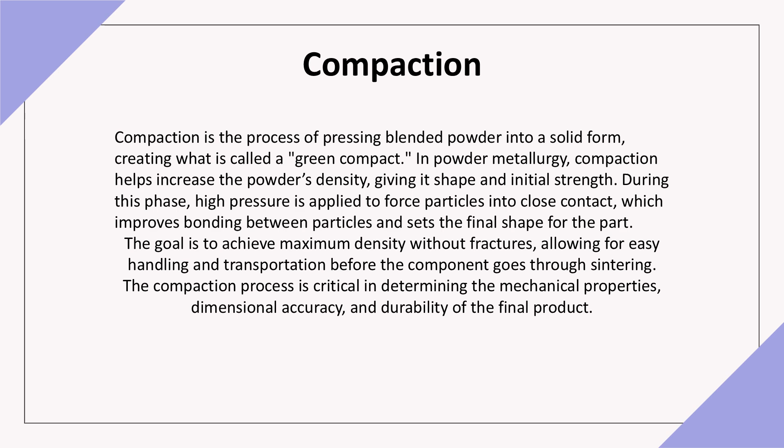Types of compaction processes: Cold pressing occurs at room temperature and is commonly used for parts where high density isn't as critical. Pressure range is typically between 100 to 1000 MPa, depending on the material. Applications include automotive parts and industrial components. Advantages: this method is cost-effective and suitable for a wide range of metals and alloys.

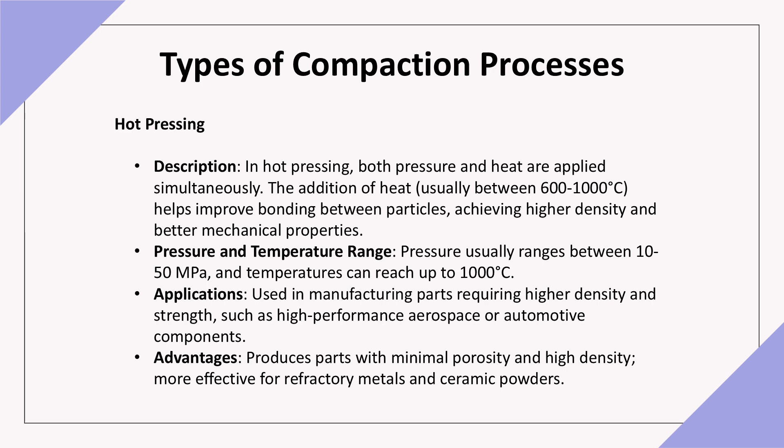Hot pressing applies both heat and pressure, improving bonding for higher density. Temperature is generally 600 to 1000 degrees Celsius. Applications include high-strength, high-density parts needed in aerospace and automotive industries. Advantages: minimizes porosity and enhances mechanical properties, especially useful for refractory metals and ceramics.

Key compaction tools include presses. Mechanical presses use consistent pressure for smaller parts, while hydraulic presses offer adjustable pressure for larger or complex shapes. Dies, made from hardened steel or carbide, must withstand high pressures without deforming to maintain part accuracy. Punches: upper and lower punches compress the powder evenly, creating uniform density. Floating dies may reduce friction during ejection, helping to prevent defects.

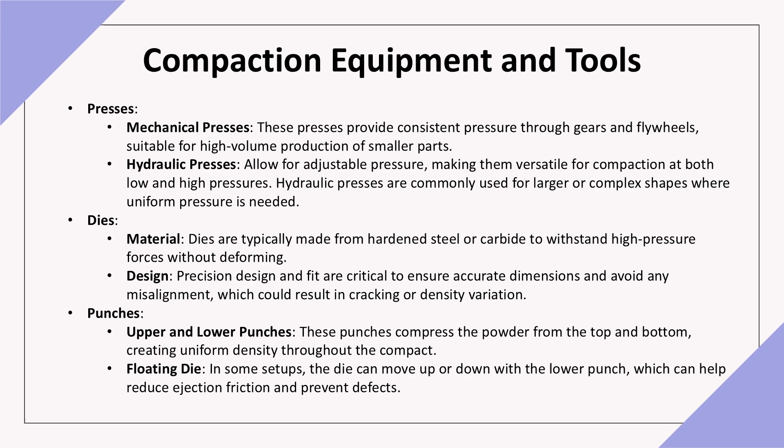Several parameters influence compaction outcomes. Compaction pressure must be high enough to bond particles, but not so high that it breaks them. Compaction speed: faster compaction can create density inconsistencies, while slower compaction improves uniformity. Tool alignment: misaligned tools can lead to uneven density, affecting mechanical properties and possibly causing warping during sintering.

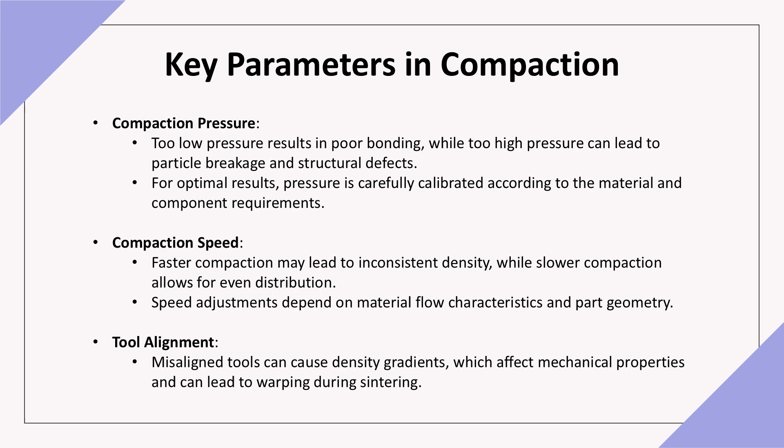During compaction, defects such as density variation, cracks, and springback can arise. Density variation is caused by inconsistent pressure or uneven powder distribution, potentially leading to weak spots. Solution: applying uniform pressure and precision in die design help avoid these issues.

Cracks and fractures often result from excessive pressure or insufficient binder content. Solution: adjusting pressure settings and ensuring adequate binder prevents these cracks.

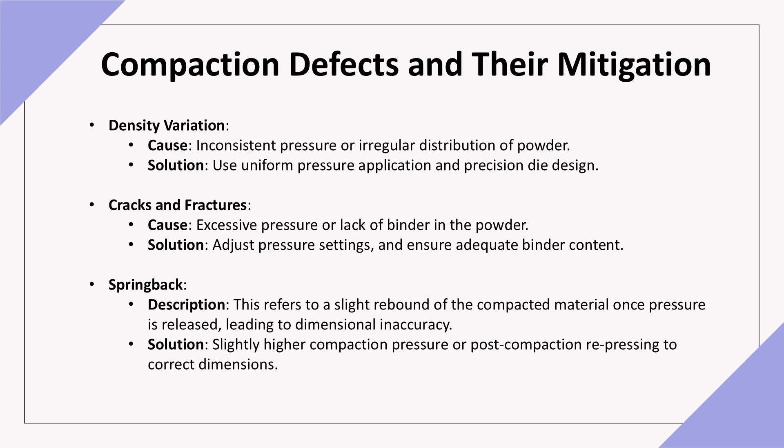Springback refers to the slight rebound of compacted powder after pressure release, leading to minor dimensional changes. Solution: increasing compaction pressure or performing post-compaction repressing can mitigate this effect.

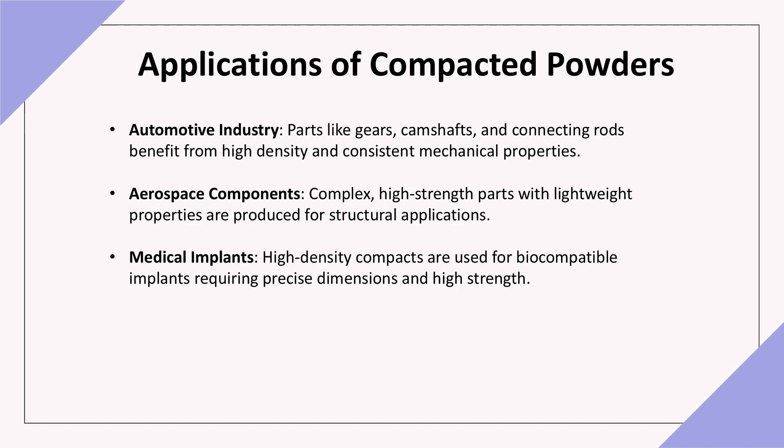Compacted powders have extensive applications in industries requiring precision and strength. Automotive: gears, camshafts, and connecting rods rely on powder metallurgy for consistent mechanical properties. Aerospace: lightweight, high-strength components made from compacted powders are vital for structural applications. Medical: biocompatible implants, such as joint replacements, are formed from compacted powders for precise dimensions and durability.

Sintering is the heat treatment stage following compaction in powder metallurgy. During this process, the green compact is heated below its melting point, allowing particles to bond via diffusion. This step strengthens the component, increases density, and enhances mechanical properties. Through controlled heating, internal voids are reduced, resulting in a solid, cohesive part with the required strength and durability for industrial applications.

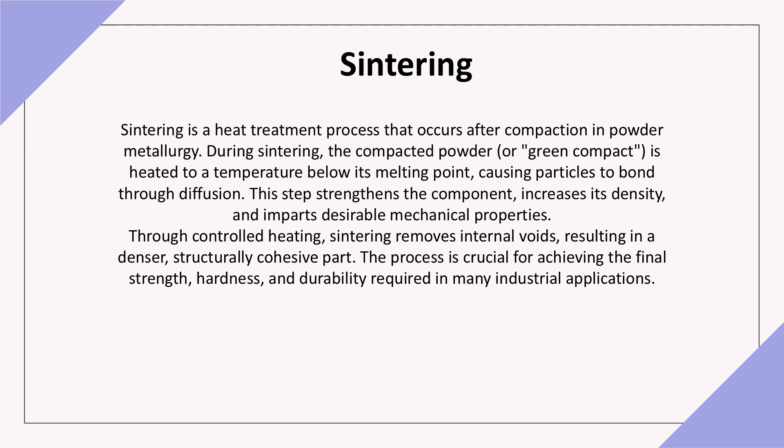Stages of the sintering process: In the initial stage, the green compact is gradually heated, causing powder particles to begin forming necks at contact points. Key mechanism: surface diffusion, where material moves from the particle surface to create bridges between particles. This stage results in minor bonding with slight densification and minimal shrinkage, setting the foundation for further bonding and densification.

As sintering progresses, the intermediate stage begins, where neck growth continues and pores within the compact become interconnected. Key mechanisms: volume diffusion and grain boundary diffusion, where atoms migrate from the particle centers to the necks, reducing pore size and increasing density. This stage is essential for enhancing part strength and reducing porosity.

In the final stage of sintering, remaining porosity is minimized as pores close or reduce significantly. Key mechanisms: grain boundary migration and bulk diffusion, allowing for near-complete densification. This stage results in maximum part strength and dimension stability, ensuring the final product meets performance and durability standards.

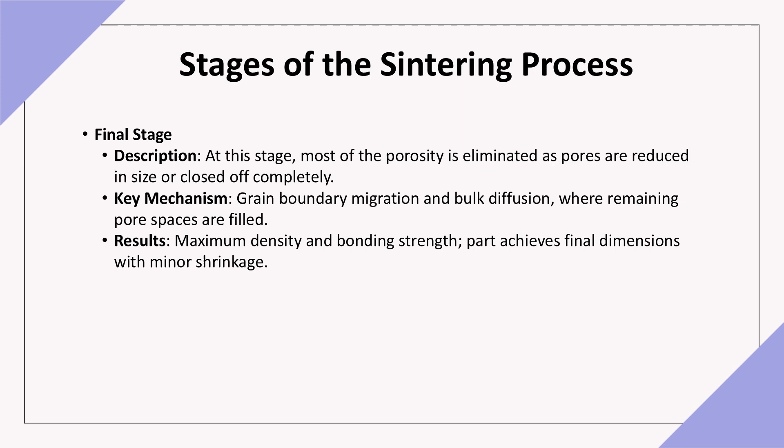Types of sintering process: Solid-state sintering occurs at temperatures below the melting point, where atomic diffusion bonds particles without liquefying them. Applications: this method is ideal for metals with high melting points, like tungsten and molybdenum, where strong, durable components are essential.

Liquid phase sintering involves adding a secondary component with a lower melting point, creating a liquid phase during sintering. This liquid enhances particle bonding. Applications: commonly used for hard materials like tungsten carbide, where binders like cobalt melt to improve cohesion and strength in abrasive or high-strength applications.

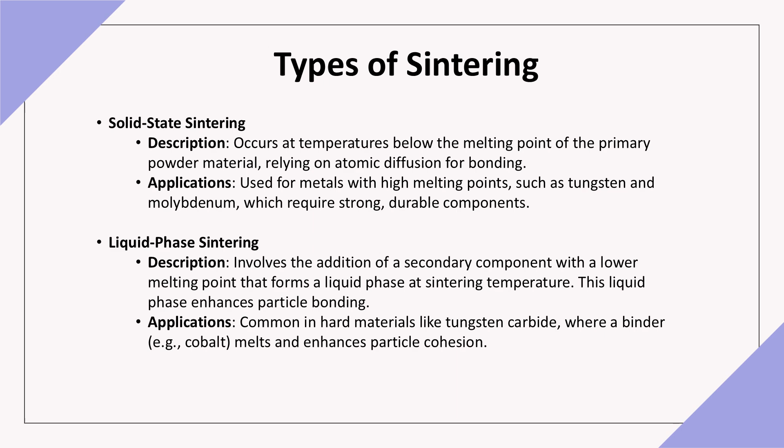Hot isostatic pressing, HIP, applies high-pressure gas, usually argon, within a sealed chamber as the component heats. The uniform pressure increases density, eliminates porosity, and enhances mechanical properties. Applications: HIP is popular in aerospace and medical fields for components requiring high density and precision.

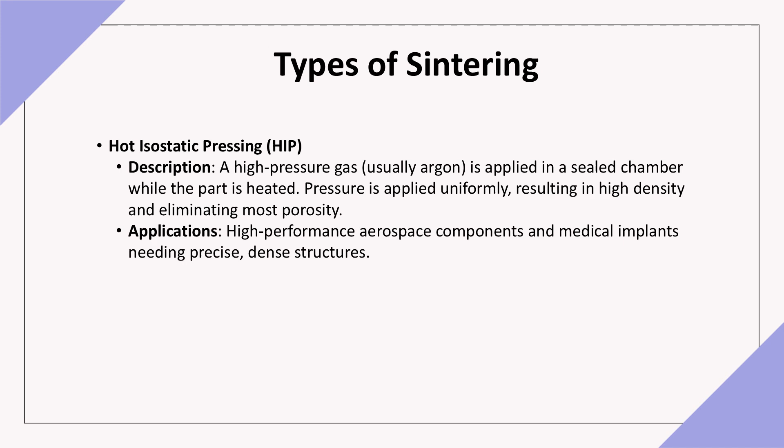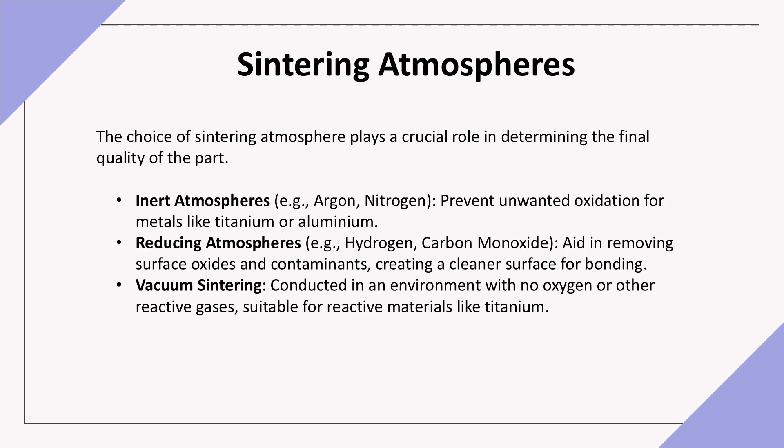The sintering atmosphere greatly influences the final product quality. Inert atmospheres, for example argon or nitrogen, prevent oxidation, ideal for metals like titanium. Reducing atmospheres, for example hydrogen or carbon monoxide, aid in removing surface oxides, promoting cleaner bonding. Vacuum sintering, conducted in the absence of oxygen, prevents oxidation for reactive materials like titanium. Each atmosphere is chosen based on the material's properties and intended application.

Several factors influence the sintering process, impacting the final properties of the material. Temperature and time: higher temperatures and longer sintering times promote diffusion, enhancing density and bonding strength. However, excessive heat can cause issues like grain growth and warping. Heating rate: a controlled heating rate minimizes thermal stress, reducing the risk of cracks or distortions.

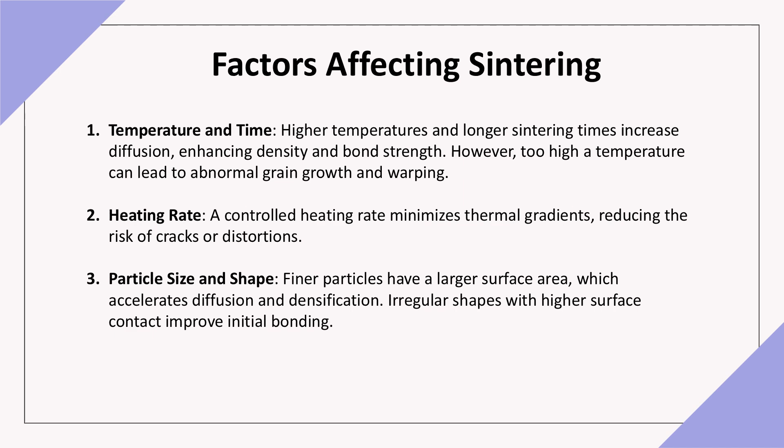Particle size and shape: smaller particles have larger surface areas, promoting faster diffusion and densification. Irregular shapes also increase contact points, aiding initial bonding. Adjusting these factors ensures optimal mechanical properties in the final component.

Common defects can arise during sintering, each requiring specific mitigation methods. Warpage and distortion, often due to uneven heating or excessive temperatures. Solution: careful control of sintering temperature and uniform heating.

Pore trapping: incomplete pore closure reduces strength. Solution: adjusting temperature and sintering duration helps minimize residual porosity.

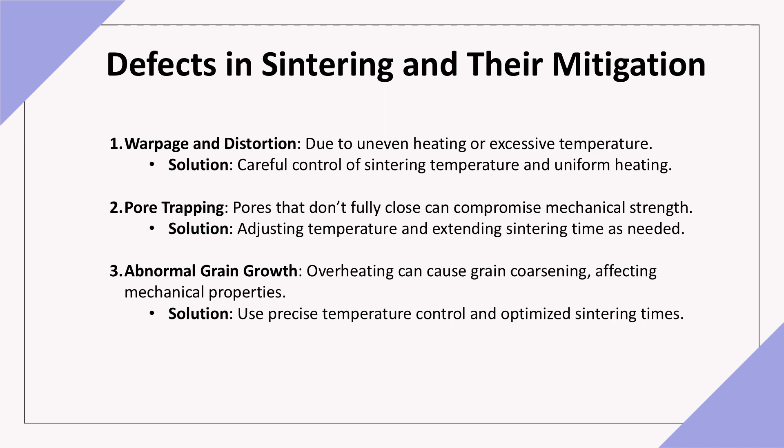Abnormal grain growth: excessive heat can cause uneven grain coarsening, impacting mechanical properties. Solution: precision in temperature control and optimized sintering duration address this issue, ensuring consistent material properties.

Sintered parts have diverse applications across several industries due to their high density and durability. Automotive: components like gears, bearings and bushings benefit from wear resistance and strength provided by sintered materials.

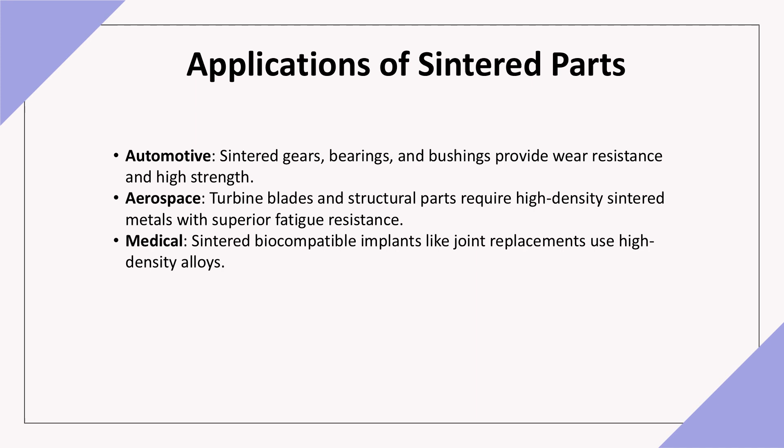Aerospace: sintered metals with high fatigue resistance are crucial for turbine blades and structural parts, providing reliable performance under stress. Medical: high-density, biocompatible implants like joint replacements are manufactured via powder metallurgy, ensuring precision and longevity in medical applications.